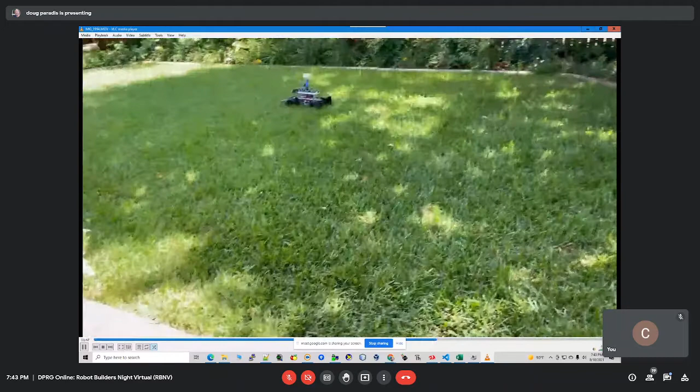Question: what's the angle on your sonars? 15. So there you see it, you see it make the big turn. So it knew it was where it needed to go, and it's headed towards the cone. And it stops. Okay.

So now at that point, I would go into the second strategy, which is the strategy that handles, okay, where is the cone, how do I come up and touch it. So, but I'm good with this, I'm real happy with this.

You might notice it's going pretty slow. The reason for that is because in my testing, I'm not running it real fast, but I could speed it up if I had to. So yeah, it looks good.

Okay, now this one, let me see here. Before I switch to this next one, I'd like to see if I can adjust the settings here. No, yeah, it doesn't look like you can grab it. Do it now. Okay, all right.

So we're going to get that second one here. Now this one is on my desk or my workbench. So here, this is kind of a close-up view.

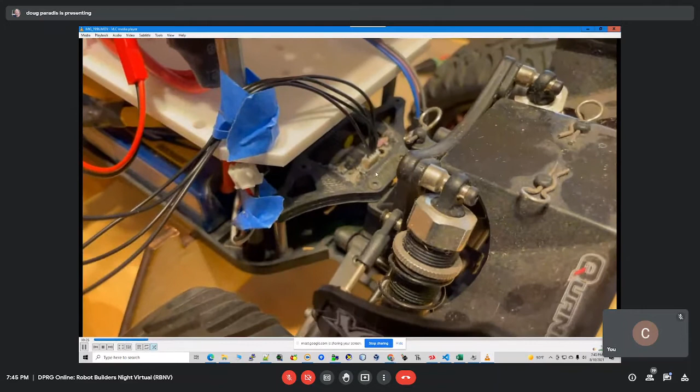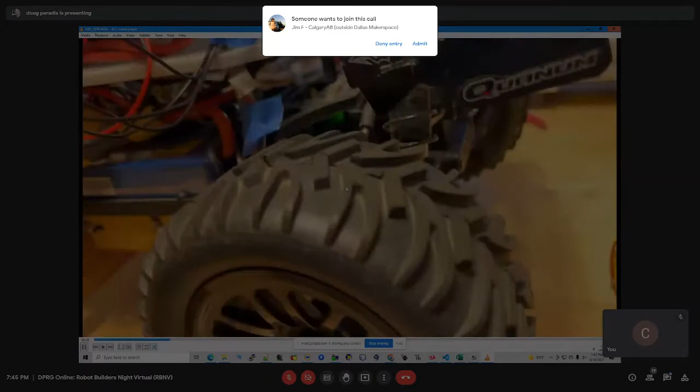Okay, so the first thing I'm going to do - this is a 1/10 scale, I'm assuming, or is it a 1/8 scale? Now you see here, see this 3D part here? That's got an optical quadrature encoder underneath it, and there's a 25 tooth gear underneath that I'm reading. I try to show it, but you can't see anything in there. But it's right where my mouse cursor is.

Okay, so these wires are coming out of the encoder and over to this. This guy would normally be mounted up here, but it's easier to work with them out.

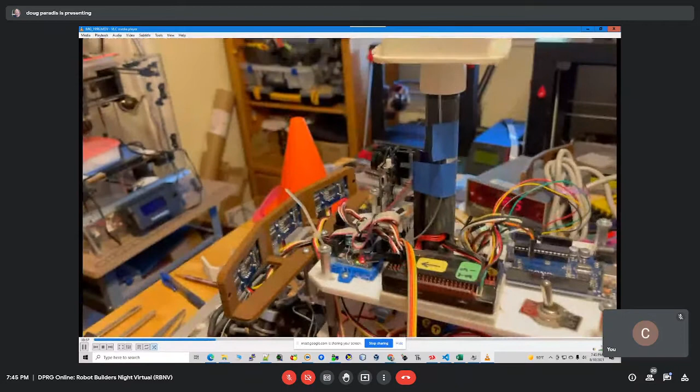Okay, now this is the Pixy Cam, and I'm using a strategy I used before, which is to run it to an Arduino Pro Micro and use a serial port to transfer. Now these two LEDs will show you what the Pixy Cam is seeing here in a minute. They'll just show left and right.

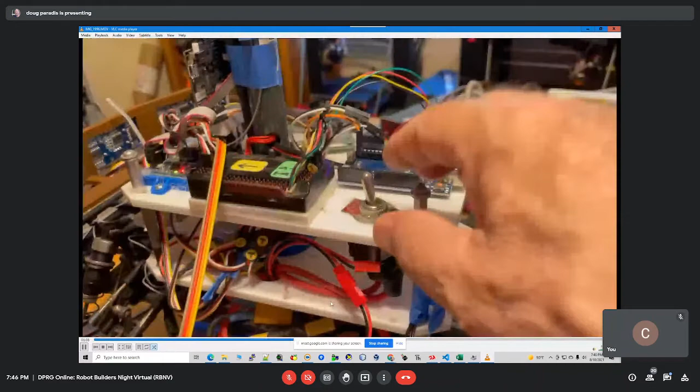And here I am, I'm opening up the scale, so just to make sure I don't see any gaps. Now I'm going to go look at them for the quadrature here in a minute.

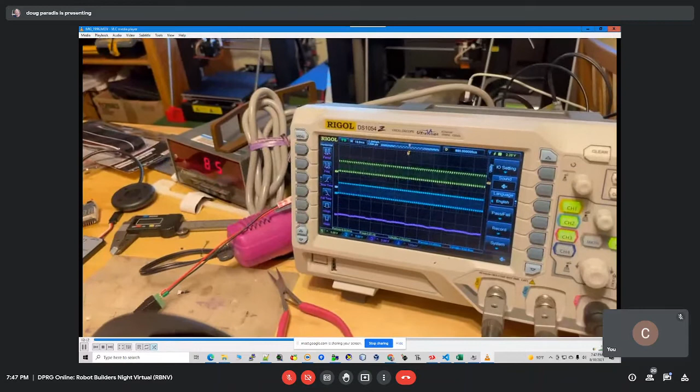Yeah, so let's see if I can get it. I had a little trouble getting this, let's see, I'll get it to lock in here in a minute. Okay, there you can see the quadrature, the 90 degrees. Yeah, so everything seems to be working okay with that encoder that I put in there.

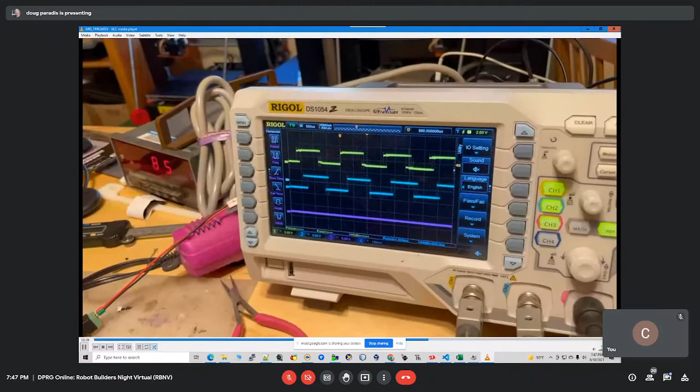So that means that I'm probably not going to use it for actual odometry. I plan to use it for speed control.

So now I'm going to look at the Pixy Cam. This is a Pixy Cam 2.1, the newest one. And okay, now I'm moving the cone back and forth. I don't know if you can see it here, but you'll watch the LED, one will come on and then the other one will come on, and there'll be a brief period in the center. I didn't realize I wasn't actually showing the cone.

Okay, I think these are actually switched, so I'm going to probably have to change the code. That might be a small bug. But what it means is I'm getting a real good signal that's indicating how far away from center the target is.

Now, the big advantage of the 2.1 is it has a field of view of 80 degrees, so that's kind of nice.

What's the thing with the yellow and green sticker on top with all the pins coming out? That's some sort of... trying to, when you get old like me, you can't remember where the different things go in. No, what is that? What is that widget? It looked like a semi-clear enclosure of some sort of device.

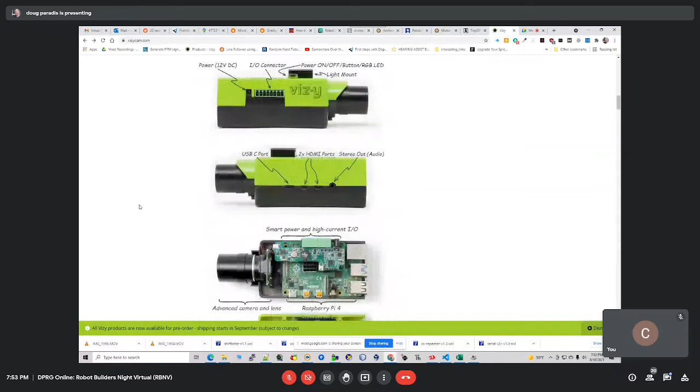Let's see, the other thing I wanted to mention is this. When I was working with the Pixy, I was on their website a lot, and this is a product they're talking about — it went through Kickstarter a while back, and it's kind of interesting. You can see a Raspberry Pi 4 module inside, and they show a couple applications. Since it's a Raspberry Pi 4, you can do anything you want with it.

I'd like to ask you about the effectiveness of your Pixy Cam if you've gotten a chance to evaluate it. I know the guy that's won this contest several times with perfect scores has used a Pixy Cam to do it. So you can do it. Now there's some problems you have to watch out for.

You're gonna have... from a light point of view, it's okay. From a light point of view, you see how I'm all washed out here? The same thing can happen to you out in the bright sunlight. Now they do have a way in the newest version of the Pixy software, which I haven't tried yet, where essentially it will take this out of consideration. Otherwise, if it's too saturated, it just creates spots in the image that it doesn't look for.

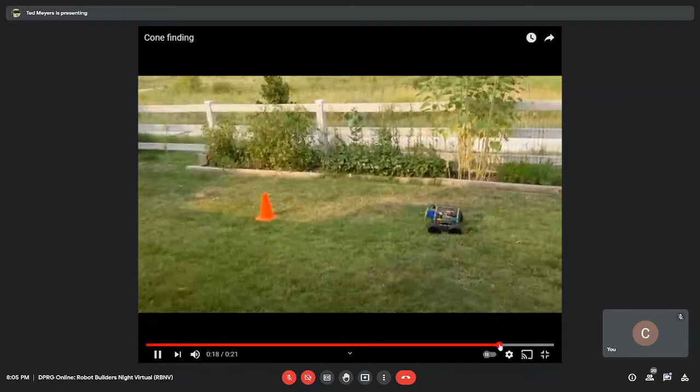So let's see, it... oh, come on, back up here. So it stops when the blob gets big in the view, and that's something I can adjust also. Although if I set it too much, it just runs over the cone and gets high-centered and stuck, so it might be a better strategy to just get close to it and not actually run into it.

No, Ted, you're so close. That's great, that's fantastic. All you need is an ultrasonic to give you the distance. That's it. Yeah, or just a whisker sensor, I was thinking of doing that. And you can do that because gently touching the cone is tough. Running it over is not so hard.

Yeah, let me get it this way. It's hard because you have to be at the cone, but you know what I'm saying. Doesn't that front plate of yours have a trigger on it? So when you just touch the trigger, shouldn't you know it? No, right now that's just the passive bumper I was using to protect the camera. Sounds like you could put a switch on that thing and let it bump, and there you go. Yeah, exactly.

Maybe, but my robot's not going to even do any of that, so maybe I don't know what I'm talking about. Yeah, that's a good idea, that's probably my next step, is to put a switch on it. In a previous contest I had trouble with the switch where if the robot got bouncing too much, the switch would trigger, and that caused me a whole ton of issues. So I'm kind of reluctant to do that, but I might do it. Just set the switch so it has enough resistance that it doesn't bounce around.

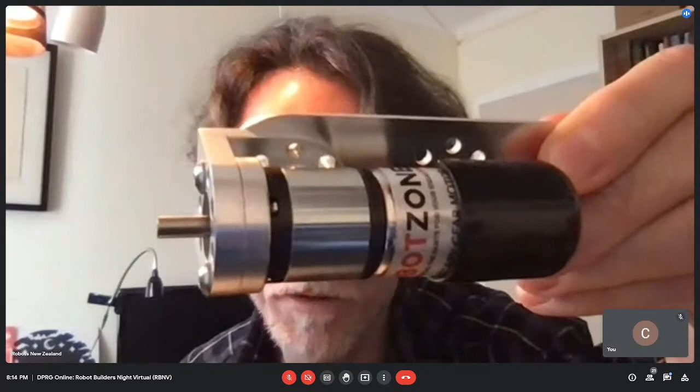If you go to Servo City, they sell yellow jackets, which come from goBILDA, the same company. This is a 22 millimeter rather than a 25 millimeter motor, and it comes in different gear ratios. The benefit of this one is it's actually got ball bearings on the output. I was taking Doug Paradis's advice, and this has ball bearings on the output, and it fits into their whole scheme of mounting things.

So you can mount it, maybe just buy one mount and this L bracket thing, or you could buy a whole robot worth of parts. These 22 millimeter motors are pretty powerful, and they have a nice stainless steel D-shaft on them. At 22 or 25 millimeters, you get pretty torquey motors.

The little tiny N20 ones, if you go 12 volt high power, have a stall current of like 3 amps, so some of the small N20s for a small robot are certainly big enough. But I'm working towards a small Mars rover, and I'm going to go with the 22s because there's quite a lot of torque on this thing. And the gear ratio, obviously, the lower you go the higher the torque and the lower the speed.

So those are 12 volt motors? This is a 9-volt, I believe. The yellow jackets are 12 volt, but they are probably overkill for most robots — in fact, they're overkill for my robot. They're big, heavy motors, very powerful. Yeah, I'm just trying to drive around my little telepresence robot.

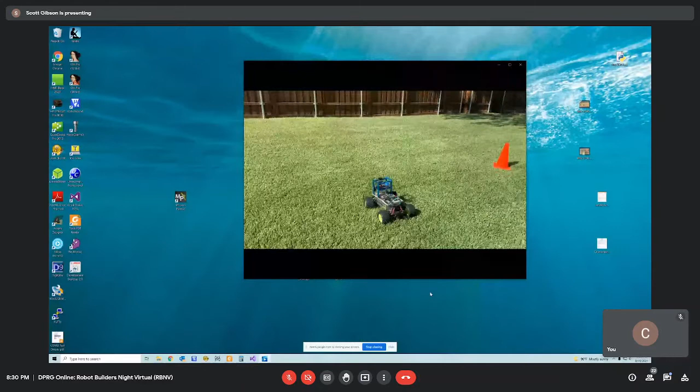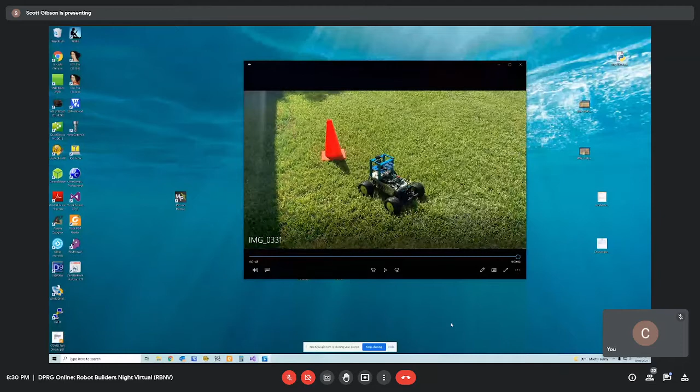I'm not in the contest itself, but I was wondering about the rules on what comprises getting to the cone. When the robot clearly indicates it saw the cone and went up to it, does it have to actually touch it or be within 3 feet? There's a point system - if you stop within 10 feet of the cone, you get 2 points. If he touched the cone and stopped while touching it, he would get 3 points.

But let's say he never stopped - he just drove by the cone and got within 10 feet but kept on going, or he hit the cone and it flew, it kept moving, but he didn't stop. He gets 1 point.

So you get a point if you get close. You get a point if you get close and stop. You get a point if you're close and stop and touch the cone. And there's 3 cones. I decided that getting a bumper switch on there just wasn't worth all the effort.

Sometimes it'll actually go up and hit the cone depending on what the camera is doing, because basically if the width in the screen of the camera, the blob, gets big enough, I stop. So it depends on how well it's picking up the cone and whether there's reflection from the sun. Sometimes it will run up on the cone, back up and turn around - I like the way it turned away from the cone, but that's something I'm still thinking about how to do correctly.

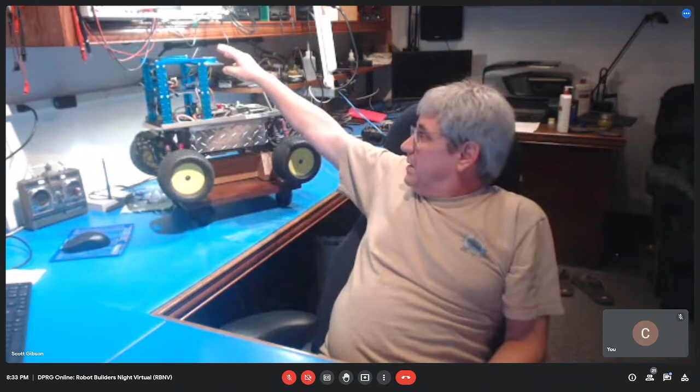Yeah, it's just kind of spare parts. I've got what they call a Navio board, which is a piggyback board for the Raspberry Pi, and it's got an IMU, a GPS, and the servo interface, the RC controller interface on it. But I found that the IMU on it is very unstable because it's so close to the motor. So I used a BNO055 as an IMU up here on top, but I've had issues with it resetting and recalibrating. You really have to be careful, especially if it bumps into something - I presume it's throwing the accelerometers off, and the yaw changes quite a bit.

I'm using the GPS from the Navio board, that and the RC interface. I've got some sonar sensors in the front, and the obstacle avoidance is kind of rudimentary right now. It will drive around things most of the time, but they sit really low to the ground, and the grass was really thick, so I have trouble with them triggering off of grass or tall weeds. In Burp, I have a tilt mechanism so I can tilt them up and get away from ground reflections, but I don't have that here, so that's going to be kind of iffy whether that works or not. I just have a Pixy 2, or actually an original Pixy camera, for the blob detection. So there's nothing really cutting edge on it, just parts I had laying around pretty much.

Scott, when you talked about the Navio being unstable being close to the motor, do you mean from vibration, or do you mean from electrical noise?

I didn't investigate it too much, but whenever the thing took off running, the IMU just went wacko. I also had trouble running it on the Pi because the Pi isn't deterministic, and the code generating the IMU readings, since it's basically just an accelerometer and magnetometer doing Euler angle calculations in software, had inconsistent call rates because of that.

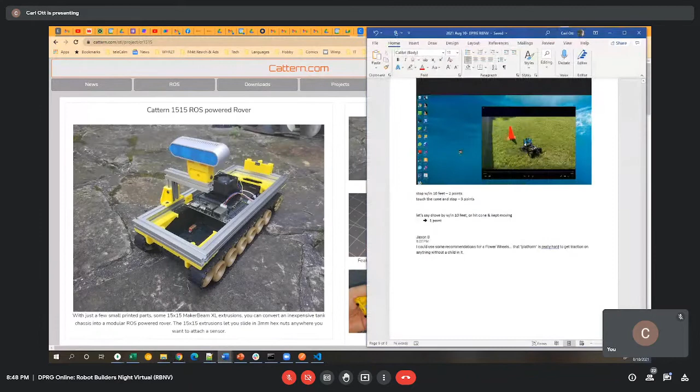I really like the tank chassis, and I've built some that required a lot of printing, but this one minimizes the printing because it uses little 15 by 15 extrusions. You can slide 3mm hex nuts into the aluminum rails and attach a sensor anywhere you want. So you could just go nuts with sensors on this design, and the printed parts are very small, so it doesn't take very long to print the yellow parts. The tank chassis sell for about $8 or $9 and have 2 motors built in.

That's pretty clever, all in all. So are you planning to bring that to the August thing? Unfortunately, it doesn't have the range - I looked at how far it'd have to drive, and I estimated a range of about 100 meters max. So I'm trying to prepare my Lawnmower Robot, which has 8-inch lawnmower wheels and 4-wheel drive with little gear reduction 12-volt motors. I've got a much bigger one that I'm trying to get ready, but my hardware isn't going to be ready until next weekend, which won't leave me enough time for software, unfortunately.

But this one does have some parts that are very generic. I show it with the Intel RealSense camera mounted on it - it's got a standard 1/4-inch screw thread, so you can mount almost any camera that's not too heavy with the mount shown in that picture. There's also a standard Raspberry Pi V2 enclosure, and all the parts are interchangeable.

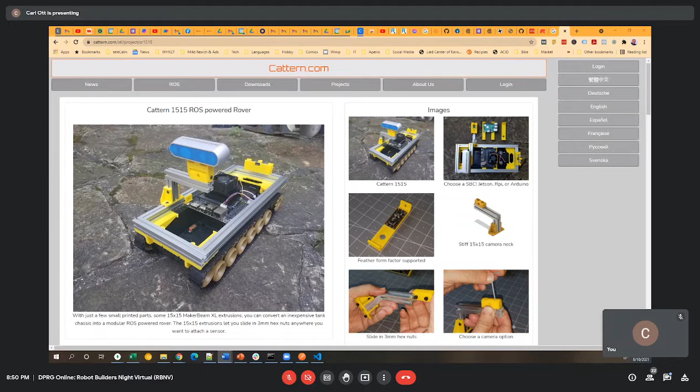So that does look pretty clever. It'd still be great if you were planning to come in person to bring it along - I know at least one person would like to see it. Looks really interesting, even if you don't plan to run it in the contest, just bring it out for display and share ideas, we'd love to see it. Yeah, that sounds like fun. It goes for everybody by the way. I plan to bring some that won't really run. Yeah, show and tell sounds a lot less challenging. Yeah, absolutely, it'd be great.

Well, thank you Kelly, that's pretty cool. That's a really nice looking robot there. Be interesting to see more about it later, see what it can do, for example.

All right, who would like to show something next? Anyone? Oh my, we're drying up early. I can show my Spot Micro build if you have nothing else. No one else? All I've got is a bunch of whining, so it's not going to do anybody a lot of good. Oh boy, I've got a small update. Well, let's go - I think Glenn has something, and then Pat, that was you. And I have a small update too, but I've got a question too. Okay, so we've got a whole bunch - Glenn, Pat, Kareem, Carl. How's that?

Okay, so the project I'm currently building is the Spot Micro Robot Dog, and I can walk you through the build of it. It's currently in pieces. I just finished printing all of the parts for it, and I'll walk through some of the challenges with it.

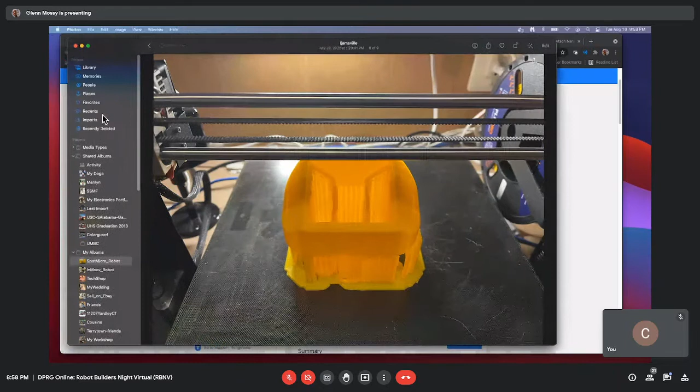the robot itself, the build of it was quite challenging. I had to figure out the best way to print, for example, the head, if you don't print it standing up.

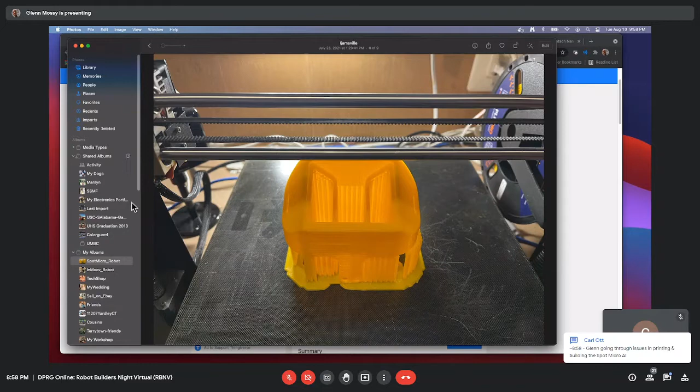I wanted to get a sturdy build as well as make it shiny, make it at least look nice, so I didn't want the raft or the bed to mar the surface of the head. So you had to figure out the best way to print the parts, so you can see it comes out with a lot of support that way.

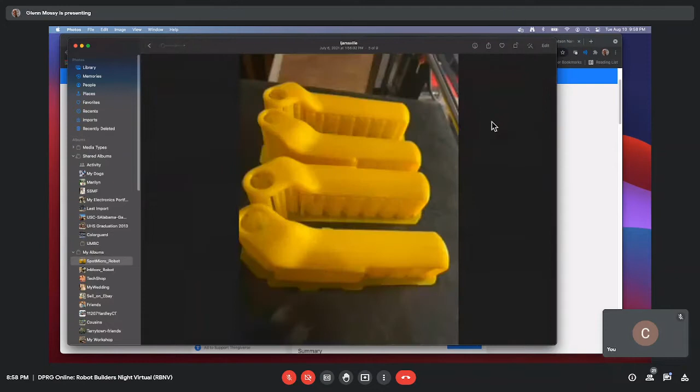But the legs also, I kept printing them. These legs look okay - the shells go on the leg here, and they kept breaking every time I would try to put them together. You have the 996 servo here, and they kind of snap fit in place. They have a roller ball bearing on the front, and they snap in place, and then there's some screws. So if you don't get that printed right, these things kept snapping in half. I had to finally print them like this, and I was able to get them printed.

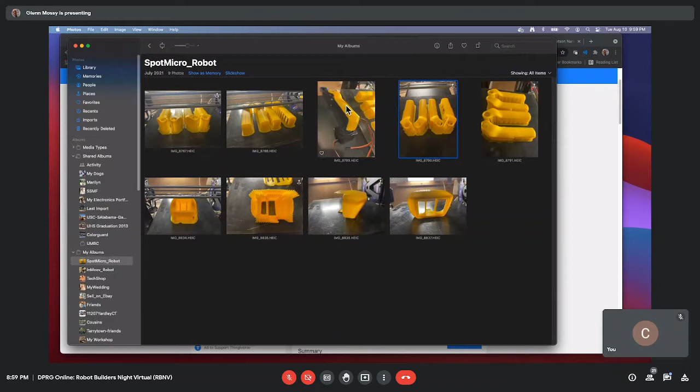What material are you using? This was actually just PLA, but I started printing - I just got some black. The yellow is really just a shell, although it provides a little bit of support. For the black leg part, the part that needs to be sturdy, I am using PETG. These parts, the legs, I wanted to get them really sturdy, so I printed them with PETG at either about 50% or greater infill to really get some real sturdy legs out of that.

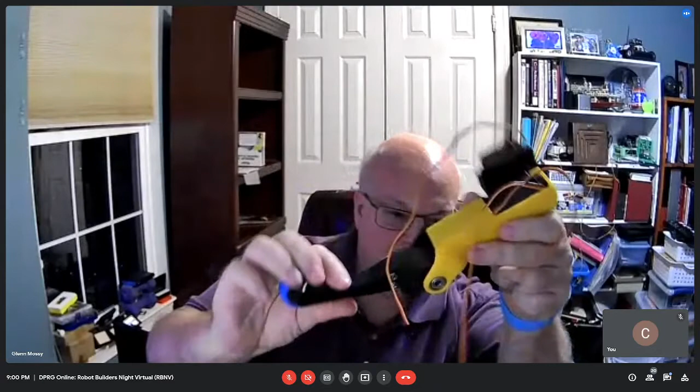Let me show you, to get the legs really sturdy. They're pretty sturdy, and I like the way they snap together, but they have plenty of screws that are kind of tricky to figure out. You have a screw there, but you got to get the right order of the screws for the servos. You got to get the screws in, then put the servo and snap the plastic around it and still get the ball bearing on it. And then getting the last piece in was tricky to get that in.

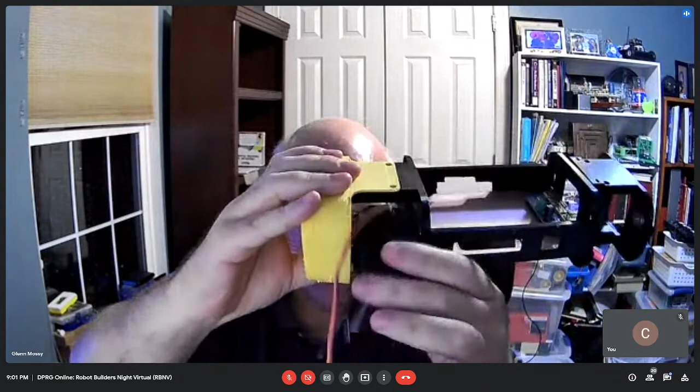And then the issue that I'm working out with the joint mounted on the body is I need to make sure there's no gap between the body and where this servo mounts into the chassis, and I have to grind down a little bit of the plastic on the inside to get the servo horn so there's not a gap, because I want this servo to be seated really well so the leg doesn't pop out. If the leg pops out, it's gonna either break, or I want it to be really sturdy to walk on all four legs, because there'll be a lot of stresses on it.

So it's gonna be a dislocated shoulder, huh? Yeah, it'll be a dislocated shoulder.

So that's my challenge right now, is making sure that I can get these servos seated so that I don't have dislocated shoulders, and then still be able to take the thing apart if needed to maintain or fix the electronics in there. There'll be, like I said, an LCD display and a stop button on the front. I might use a micro LCD display, and then the head electronics on it.

Today I just printed the chassis for the Nano board, for the Jetson board, to house both the Jetson on it, and then the little PCA 9685 will sit next to it in the middle of the board, because the stands for the board broke off my other print. So I printed this in PETG with a lot thicker supports, so that this doesn't fall out of the robot or fall off while he's moving around.

Do you have an application in mind for this robot dog, or are you just goofing around and experimenting? Mostly goofing around and experimenting with it. I mean, the application would be to experiment with machine learning on it, human AI recognition, and put some TensorFlow and PyTorch machine learning on it. So that's my real goal - to put real world machine learning with TensorFlow and image and vision recognition in it, so it walks around and recognizes people and speech and sounds, and vision recognition ultimately. But I'll work on one little piece at a time to get it right.

I have kind of a certification, almost a degree in machine learning. So I'm going to put either some TensorFlow or some PyTorch development on it.

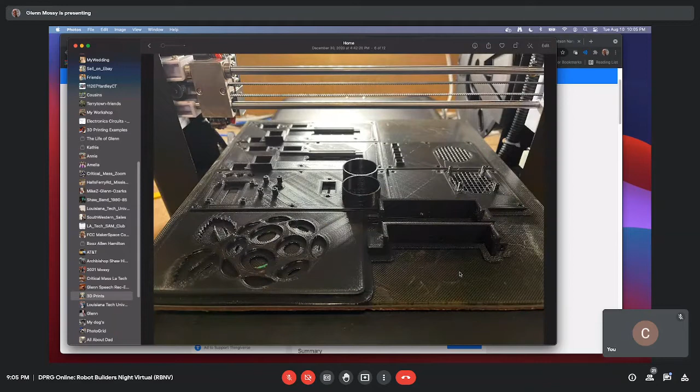I'm also working on the InMoov robot - I have it in pieces behind me. Has everyone heard of the InMoov robot? Not yet? I have it behind me, I can pull it out off my shelf, but it's kind of in pieces. Let me just show you what it is first.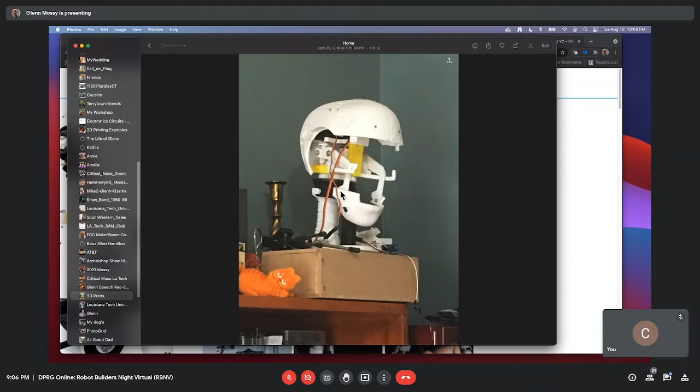The eyes will have either a single or a dual Raspberry Pi camera pair in the front, and the mouth is activated with a servo sticking down in the middle, so the mouth talks - you could tie it up to speech recognition or have it say whatever you want from the internet eventually. So that would be something to do with it, would be to just have it recognize people and move its hand.

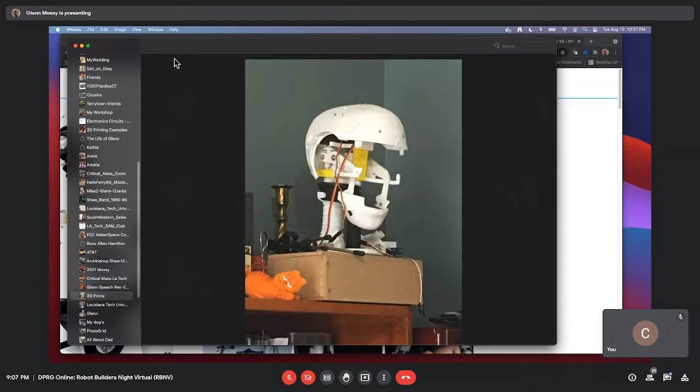I'm printing the hand - I've just printed one of the hands, the arm, and it's got 5 or 6 servos in the hand. If I could show you a close up of the hand somewhere.

Let me see if this picture has it - I could show you from the build of it. If you go to the build and go to the hand, you could see really good pictures of how it's built. Or there's a video, but you could see there's 5 servos in the hand that pull this heavy fishing line in the fingers, and I've got all the parts. You can see how it pulls, it's strung to all the fingers in there.

Quite a challenge to print though too, because I was printing it all in PLA, and I'd recommend you print it in PETG or ABS instead, because I had to reprint most everything, like twice, the way I was printing it, to figure out the best print infill and everything to get it printed, because otherwise it keeps falling apart when I build it.

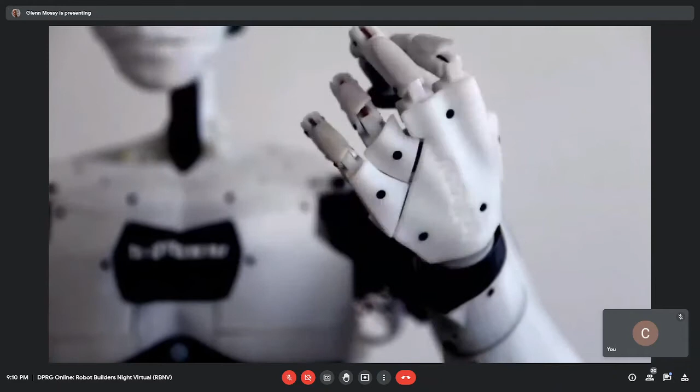That's an awful lot of servos. Yeah, it's quite a bit of servos - that's why I'm just working on the head and the hand right now to get that right.

Tell me if you want me to stop for time's sake. Okay, rest.

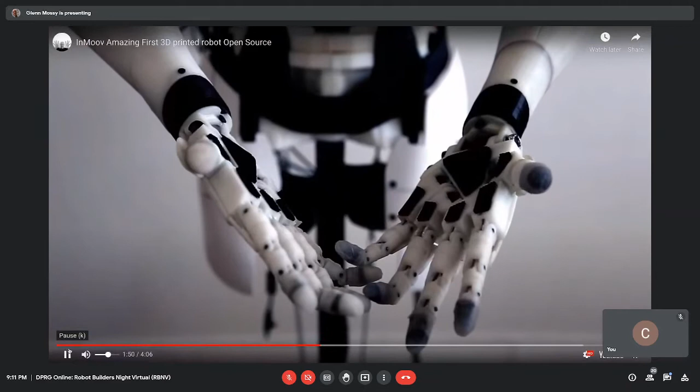So are you planning to build this whole thing, Glenn? No, right now my focus is just on the head. Let me stop sharing for a minute and I'll show you.

I can put a lot of these links in the chat. My focus right now is just to get the head built and the hand and the arm, because it took me quite a while to print all of the hand pieces and parts and then reprint everything, a lot of the pieces 2 or 3 times.

I have the head in a box and the parts in a box. I put it down for a bit and haven't gotten back to it. The reason why I had to reprint it a lot is because Gael, the inventor or original designer there, uses a lot of servos based out of Hobby King from England.

And to get the cheaper servos, because it does use a lot of servos, to use the cheaper 996 or more common servos that are available cheaper on Amazon, some of the parts have to be redesigned, and it's a lot of head structure to do that.

No, a couple people are dropping off, which happens sometimes, but that's okay. I had a question, was there... I might have missed this. Is there a projected cost to build one of those things? Like how much is it? Any idea? Yeah, I mean, it really depends.

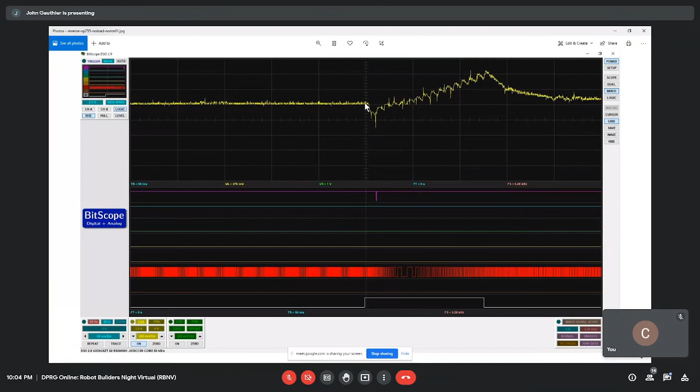So now you can see, this red plot here is the encoder output of one leg of the encoder. So you can see I'm running along at, let's see, this is at 200 millivolts. That corresponds to, I can't remember what, it's well under the current limit for the motor.

And then when I throw it into reverse, I use constant acceleration to go from full forward to full reverse. You can see the current climbing until I reach a peak here at about 600 millivolts. I can't remember the conversion factor on the current, but it's well under the current limit for the motor. And then it drops off as the motor continues to accelerate.

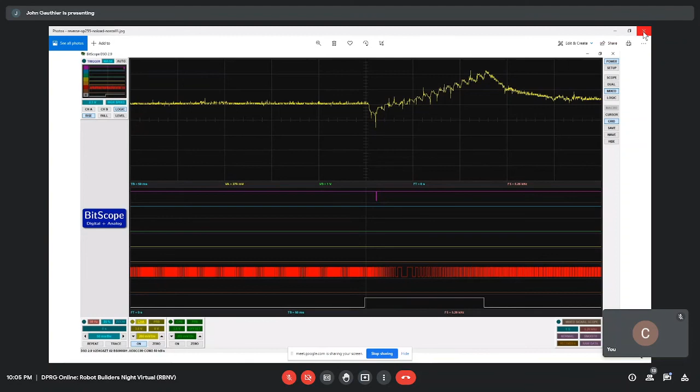I think David Anderson has been using, and I use the same term, he's got what he calls a slew limiter. Yeah, I think it's basically effectively a slew limiter. When I change speed, I basically change speed at a constant acceleration, and that acceleration is well below what the gearbox can withstand.

Yeah. So this slew limiter that I implemented is actually operating above the PID control. So basically it just means that it looks as if the physics of the motor has changed a little bit to the PID controller.

Yeah, I had implemented my slew limiter right in my PID controller originally, and now it actually operates at a higher level. It works on the velocity, because with PID controllers you convert target velocity to motor power, and I want to slew the target velocity, not the motor power. My PID controller is implemented a little differently - the dependent variable is position, not velocity.